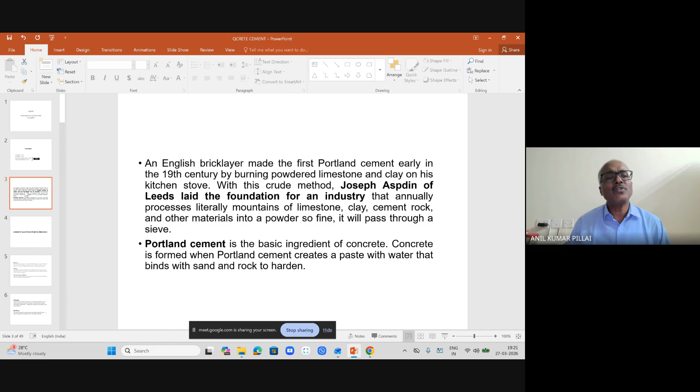Just to give you a brief overview, because when you look at cement as compared to other materials, cement is manufactured in a plant with a clear-cut manufacturing process and clear-cut quality assurance process. If you look at the Indian cement industry, you'll find the latest technology of cement manufacturing is actually in our country. We have been in the cement industry for quite a long time, and we have been able to bring in the latest manufacturing process.

So just to give you a brief overview, from a customer's perspective you must understand how cement is manufactured. Starting from the quarrying, what you call limestone mining, you'll find there are areas rich in limestone mines. Both high grade as well as low grade limestone would be there in the same limestone belt.

Other ingredients are also added, and it is crushed, ground, mixed and blended. What is important is, if you want to manufacture cement of consistent quality, the variations right from the raw materials should be evened out, and measures should ensure proper blending. We have different mechanisms for that, like the CF silo and the stacker reclaimer, which ensure that the standard deviation of the raw material is brought down. Because the challenge is to manufacture a cement with minimum variation.

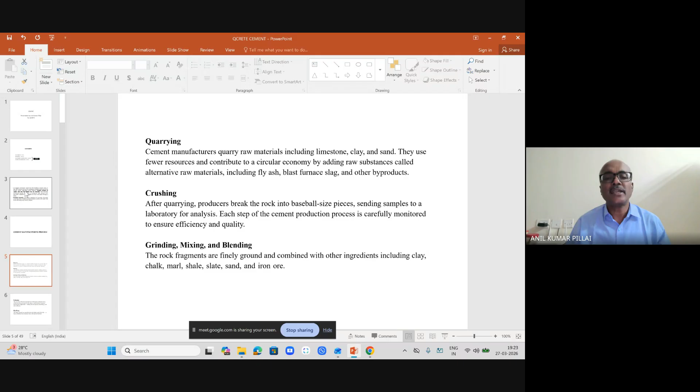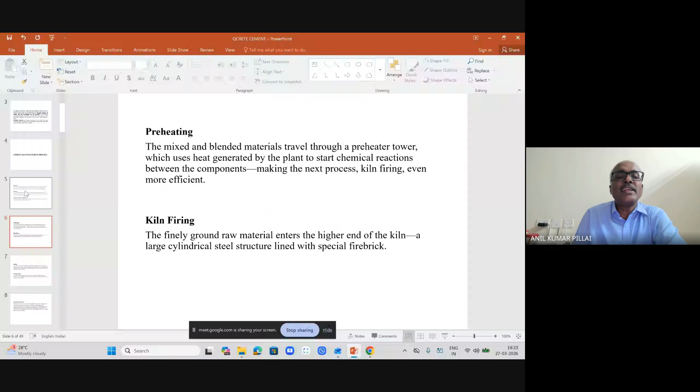You can manufacture a cement of very high compressive strength, but can you maintain it over a period of time? That is very important. You'll find the various steps, starting from quarrying to crushing, grinding, mixing, blending, and then you preheat, and then you fire the kiln. That is how the process is done. Then the cooling takes place. The kiln firing at a very high temperature of 1500 degrees centigrade, and then the cooling to 100 degrees centigrade, it all needs a lot of monitoring.

The clinker is formed, which is ground into fine powder and mixed with gypsum. Clinker is mixed with gypsum to form ordinary Portland cement. When you add a blending material like fly ash or slag, you get blended cement like PPC or slag cement. So this is the kind of process.

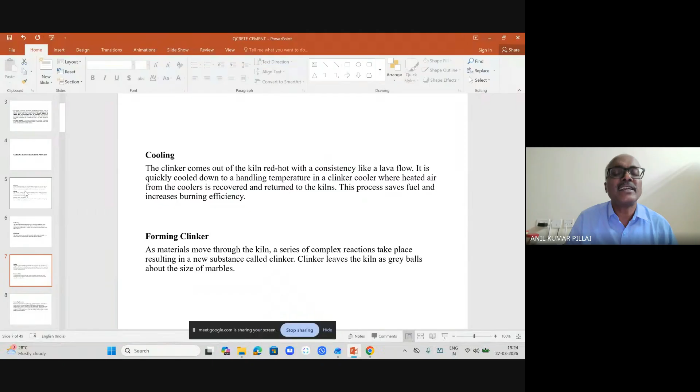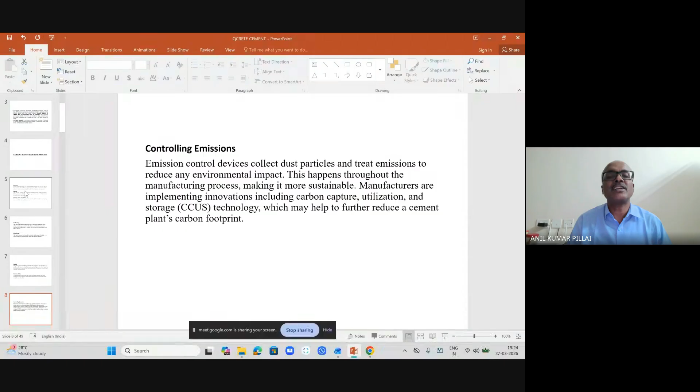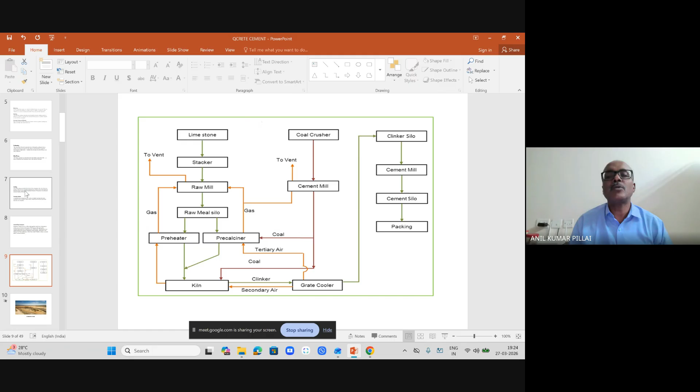You'll find that limestone quarrying is being done. The stacker reclaimer is there to even out variations. The raw meal silo, the preheater, and the pre-calciner. Before getting into the kiln, the entire raw material is heated to a particular temperature, and this is how it happens. The cooler is there, the cement mill, and this is a typical cement plant.

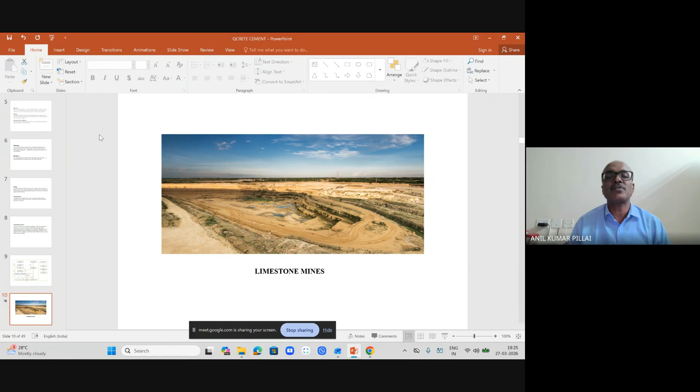So this is how the limestone mines look like. What is important is once the limestone is mined, rather than leaving the mines like that, we always have the practice of doing afforestation there, so that whatever we get back from nature, we give it back through the process of afforestation. So this is what limestone mines look like.

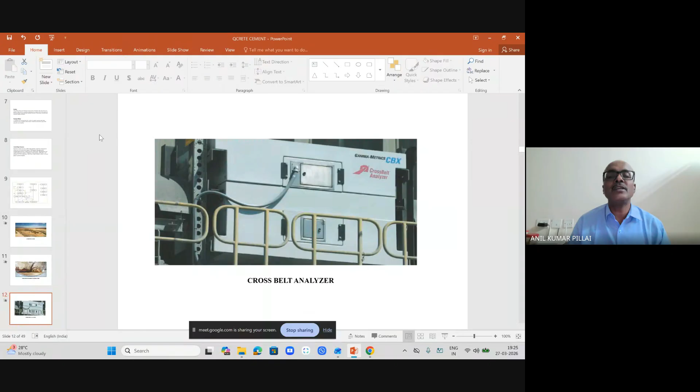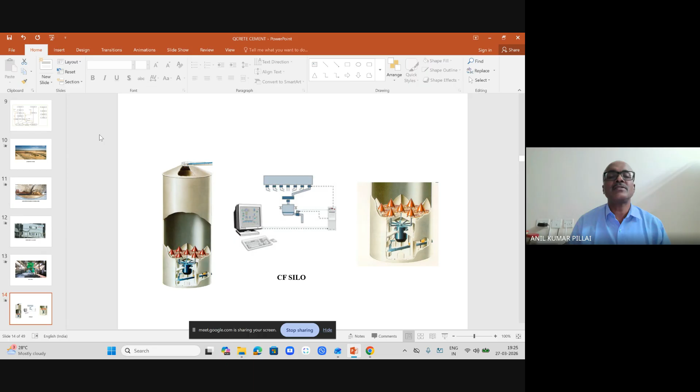So this is the raw mill, and you have the CF silo, continuous flow silo, where continuous homogenization takes place. Again, the objective is to bring down the variations in the raw materials. Then the preheater unit is there, where it is heated to 700 to 800 degrees centigrade. The kiln, as you can see, and this is the clinker.

So the properties of clinker are very important. The clinker is manufactured in such a way that the compound composition and the oxide composition are maintained so that the properties of cement are maintained. That is how you will find there are different types of cement.

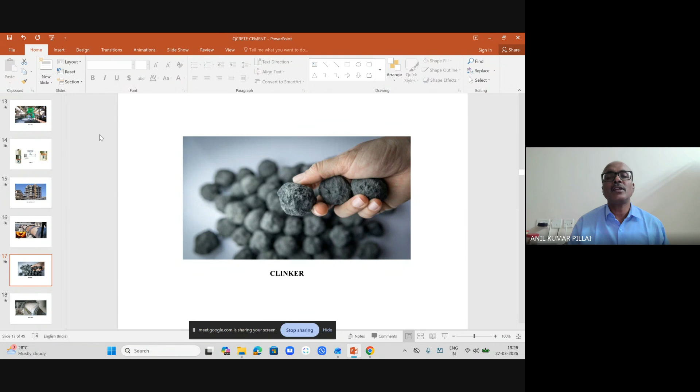Even within a particular type of cement, you can fine tune the properties that are needed. That is why we have this motto of right cement for right application, because by virtue of the clinker chemistry itself, you can change the properties of cement.

So you have the ball mill and various kinds of grinding mechanisms through which you get a cement of the required fineness. Roto packer is the kind of packer that is there to ensure that the cement is manufactured properly.

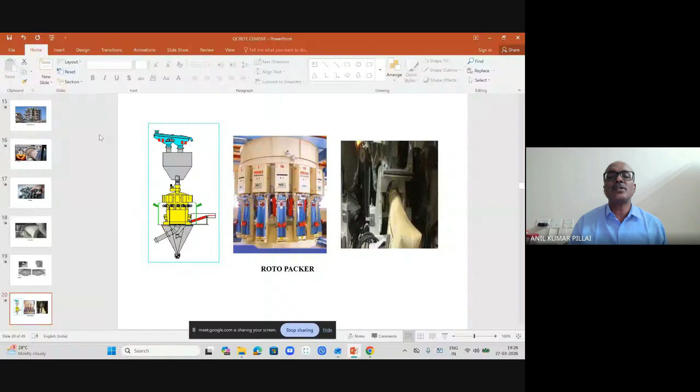This is just an indicative value because for most concrete users, they would be interested in knowing what the oxides are. So you'll find that lime, silica, alumina, iron oxide, and other minor oxides would also be there.

But what is important is the interplay between the lime, the calcium oxide, and the silica. That is very important, which enables the formation of compounds in cement. And these compounds in cement actually determine the chemistry of cement.

So that is where you'll find that when you add a chemical admixture, it is very important that you study the cement admixture compatibility. And the cement admixture compatibility to a great extent is dependent on the oxide as well as the compound composition of cement itself.

The tricalcium silicate, just to give you an idea, I'm not going into the chemistry of this, but we need to understand that tricalcium silicate gives you the early strength, dicalcium silicate gives you the later strength, and tricalcium aluminate gives the 1 to 3 day strength.

But the thing is that this particular compound, tricalcium aluminate, is limited, and because of tricalcium aluminate, we add gypsum in the cement manufacturing process so that the cement setting time is regulated.

And then you have tetracalcium aluminoferrite. So these are the compounds in cement which determine the later strength and the chemistry of cement itself.

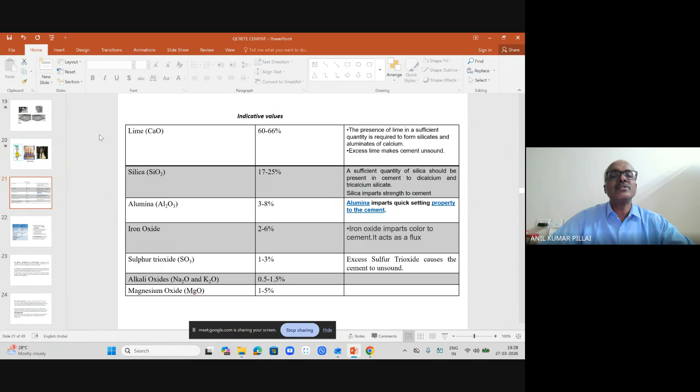Just to give you an idea, what happens in the cement manufacturing process is the oxides combine amongst themselves in a particular manner so that the manufacturing process is designed in such a way that you have the required percentage of the various compounds of cement, which gives you the strength properties and other properties of cement.

So that is how the chemistry of cement, in brief, is there.

So this is what you need to understand, that before actually starting the concreting process, there should be a kind of process in place wherein you do the trials at site on a regular basis. It is not enough that we do the trials in the initial stages and then later on, you don't do the trial.

Because what happens is that if you're having a major concrete pour, it is always good practice to have this process of trials in place at site, because we have seen in many places when this is not in place, they land up in issues and all that.

So this is what, as far as the oxides and compounds are concerned.

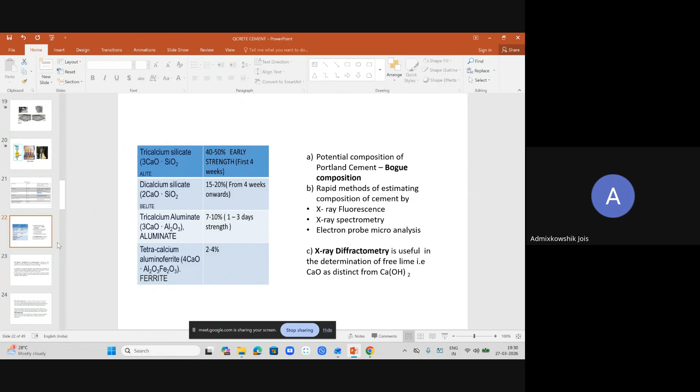Any responses? Sir, what I suggest, no sir? Yeah, you finish and the last 10 minutes we'll give for questions. Otherwise it will obstruct your flow.

Yeah, so this is the oxide and then the compound composition. And again, to reiterate, early strength, later strength, and this also gives some kind of early strength contribution in that, and this is very minimal.

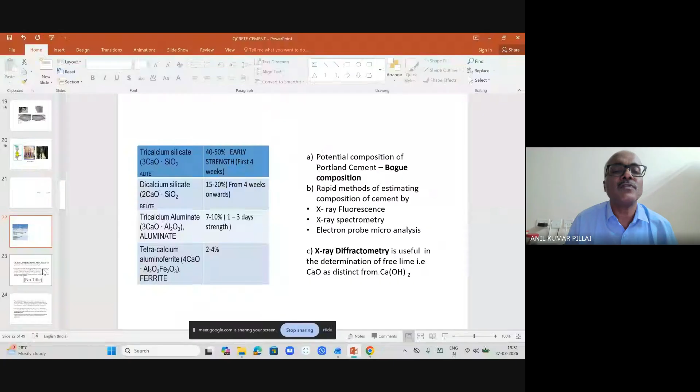And to evaluate the compound composition, you have different methods that we follow at our cement manufacturing process. Now, before checking the quality of the cement, this is very interesting. The first and foremost step that we do is the normal consistency of a cement paste.

We should not evaluate the quality of cement only based on NC, because there is no limit as such mentioned by the Indian Standard Code as far as NC is concerned. Normal consistency of cement is used to determine the amount of water that can be used to find out the initial setting time, the final setting time, and the compressive strength of cement. But in many places, people think NC should be within a certain range, like 27, 26, or 28, and if it's not there, there is some problem. No, it's not like that. On normal consistency, there is no limit at all as far as the Bureau of Indian Standards is concerned.

The normal consistency of cement paste is a laboratory test which helps us determine the amount of water to be added for the other tests involved. This is found by allowing the Vicat plunger to penetrate to a point of 5 to 7 mm from the bottom of the Vicat mold. That is how NC is determined, and it determines the quantity of water to be mixed for a given cement to give a paste of normal consistency, using the Vicat apparatus. The Vicat apparatus can also be used to determine the initial and final setting time.

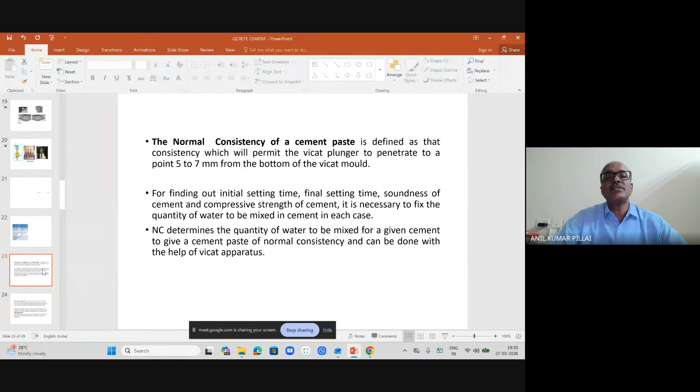If there is a mistake in measurement of NC, then your initial setting time value, final setting time value, and compressive strength of cement mortar can change. So it is very important that you measure the NC correctly. That is why at many project sites, when attempting testing of cement on site, you need to be very careful with NC, because the moment there is an error in the measurement of normal consistency, you will find that the other parameters change.

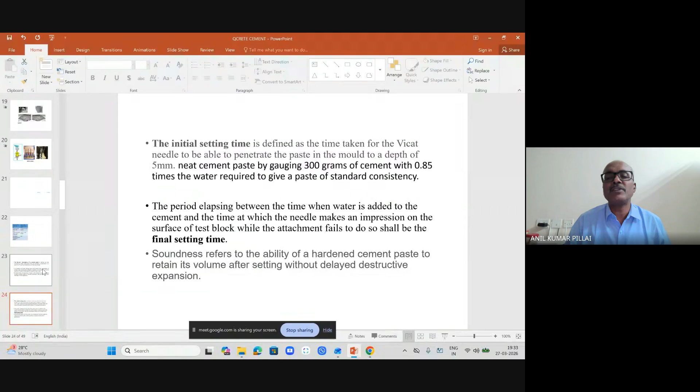The initial setting time and final setting time of cement help you find out the workability. It affects the workability of concrete and the placement of concrete to a certain extent. Of course, soundness is also there. The soundness of cement, we have two methods, Le Chatelier and autoclave, which refer to the ability of the hardened cement paste to retain its volume after setting without delayed expansion. That is what it is all about.

Unlike concrete testing, which as all of us know is done on a 15 centimeter by 15 centimeter cube, cement mortar strength is done on a 7 by 7 centimeter cube mold, under standard conditions, using standard sand which is available from Tamin. The basic idea of having a standard test is that it becomes easier for us to evaluate the various types of cement available in the market. When you have a standard test like this, you can compare the types of cement that are there.

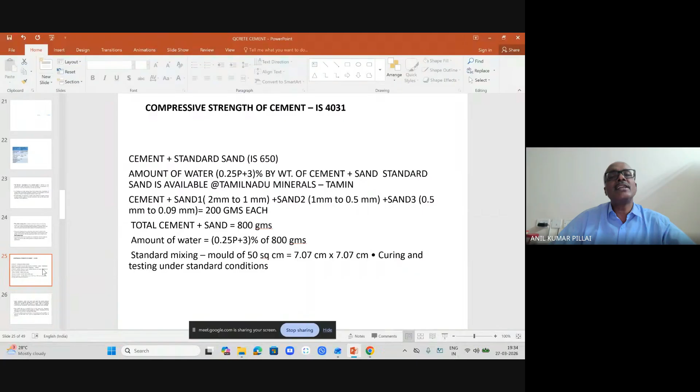This can be useful for a customer, because if a customer wants to evaluate the quality of cement, he can always give it to an NABL accredited lab, and this can be used to compare the compressive strength of various cements. Why I'm saying this is because when you look at a problem in concrete, you can dive deep into each ingredient of the concrete to find out where the problem or challenge lies. The compounds in cement itself hydrate and react with water to form different compounds.

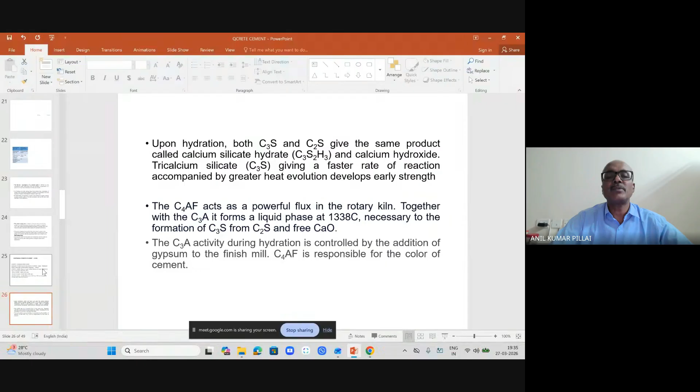It is on the basis of the hydration of various compounds of cement that it gives strength to the concrete or to the cement itself. This is how the terms C3S and C2S work, don't go by the formula alone. In cement chemistry, C represents calcium oxide, S represents SiO2, that is silica, and H represents water. So C3S and C2S form what we call calcium silicate hydrate, and calcium hydroxide is also generated in the process of hydration of cement with water. This is very important to note, because what is desirable is the calcium silicate hydrate.

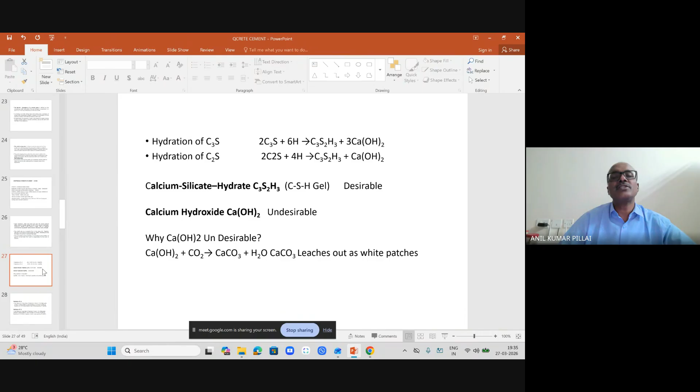Whenever you look at a concrete, inside that, if you look at the cement paste, the undesirable portion is what you call calcium hydroxide. That should not be there, because the moment it is there, it affects the durability of the concrete itself. So the CSH gel has to be increased, and you need to have a measure to remove the calcium hydroxide so that the durability of the concrete is enhanced. Hydration of C3S, as all of us know, because C3S or tricalcium silicate gives the early strength, logically when tricalcium silicate reacts with water, the reaction would be very rigorous, and more heat of hydration would be there.

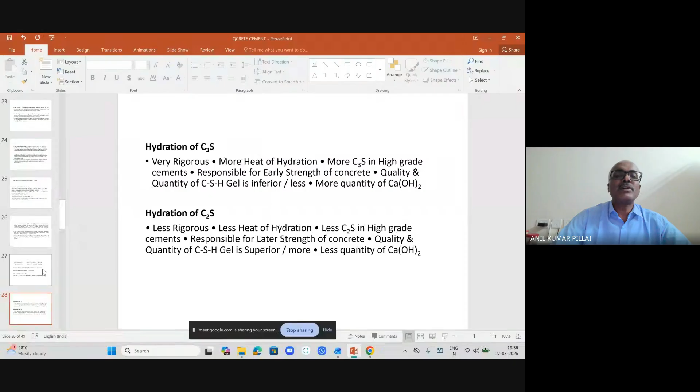C3S is responsible for the early strength of concrete, and more quantity of calcium hydroxide also comes out. Of course, C2S is less rigorous as compared to C3S, and in comparison, you will find that calcium hydroxide would be lesser.

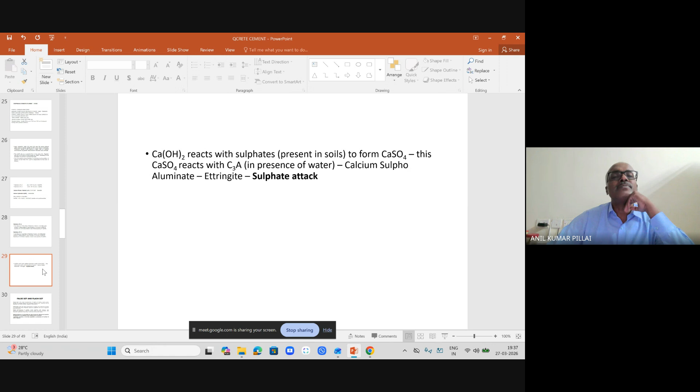Basically, what we have seen at practical sites, you will find these two terms: false set and flash set. False set is a rapid development of rigidity in freshly mixed cement paste, without the evolution of much heat, and plasticity can be regained by further mixing. So this is nothing to be alarmed about, but sometimes it may happen.

Flash set is the rapid development of rigidity, but with the evolution of considerable heat. So plasticity cannot be regained as far as flash set is concerned. It can occur due to various reasons, just as far as cement is concerned.

Setting behavior in concrete can also be due to the nature and quantity of admixture, and is different from the setting time of cement. The hydration process in concrete speeds up because of a number of other reasons also.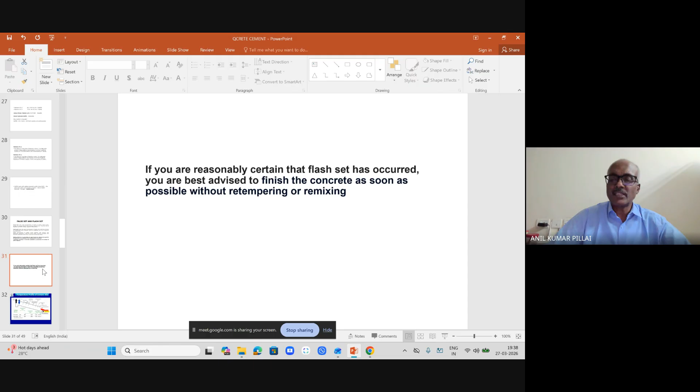So this is just to give you an idea of the difference between false set and flash set, which sometimes happens. If you are reasonably certain that flash set has occurred, you are best advised to finish the concrete as soon as possible without retempering or remixing, because in flash set, plasticity cannot be regained.

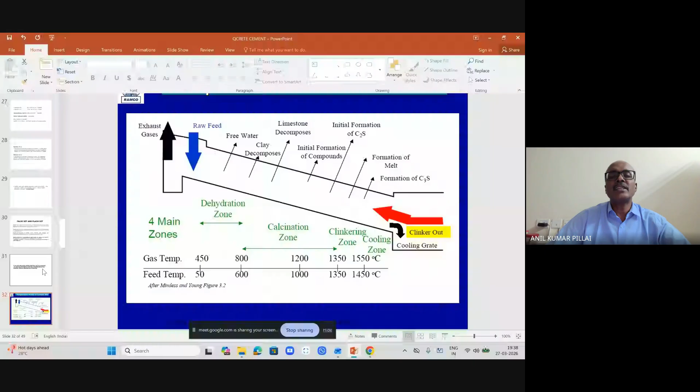Just to give you an idea, taking you back to the manufacturing process, it is very important that the temperature is maintained at various stages while the clinker is coming out. Maintaining temperature at the various processes is very important.

If you look at a cement test report, there is a physical requirement and a chemical requirement. In the physical requirement, you will find that now 43 grade and 53 grade OPC have been combined into one code, IS 269. As far as 43 grade is concerned, there is a minor change, and there is an upper limit of strength also, that is 43 plus 15, 58 MPa. It should not go beyond 58 MPa.

These are the parameters as far as cement is concerned. You will find that fineness is there, and it should not go below this limit. Earlier we had the method of sieving the cement, but nowadays we have what we call the Blaine's air permeability apparatus, where it is measured in meter square per kg. It's a much more sophisticated method than the conventional sieving method, where you have a limit of 10%, a particular percentage retained on the 90 micron IS sieve. But here it is measured using the Blaine's air permeability apparatus.

Then you have the setting time. The BIS states it should be between 30 and 600 minutes, so a cement can be manufactured between these two limits based on this. Normally you will find that the initial setting time of cement will range between 150 to 200 minutes, and the final setting time somewhere around 180 to 300 minutes. That is how the initial and final setting time of cement is specified.

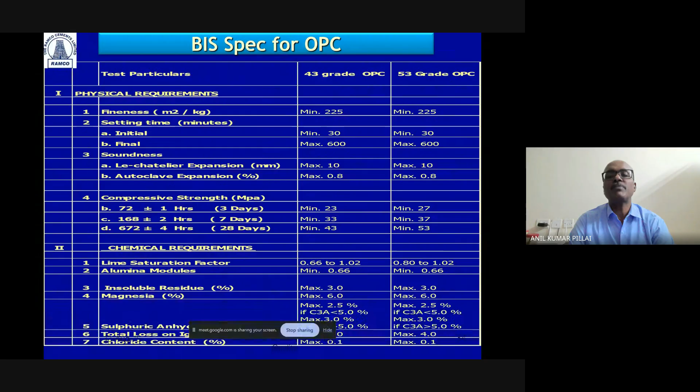So as a customer, if you are given this cement test report, you get a fairly good idea of the physical requirements of cement and the chemical requirements of cement as per the code and as per the particular cement concerned.

So this is what you will find: clinker, gypsum and fly ash are ground together to give you Portland pozzolana cement. Even in Portland pozzolana cement, you can get a cement of higher compressive strength by changing the chemistry of the clinker, as well as the chemistry of the cement itself, and by the way it is ground. That is why you will find various types of Portland pozzolana cement in terms of strength-gaining properties.

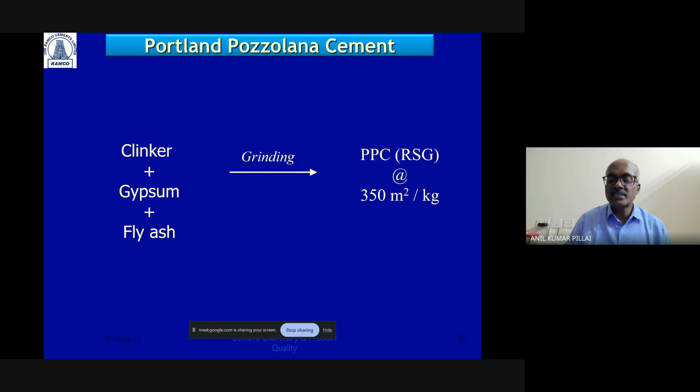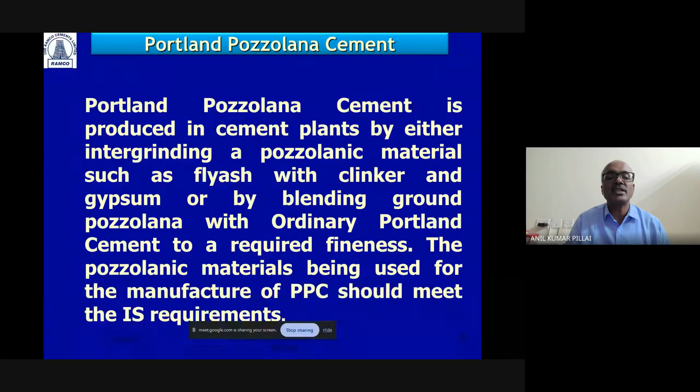So if you want a PPC with only low heat of hydration, you can go for it. Or if you want a PPC having low heat of hydration as well as higher compressive strength, you can have a cement manufactured based on that. So this is what it is all about.

And if you look at the test report of Portland pozzolana cement, the fineness would be higher. It would be close to 300 meters square per kg, whereas for ordinary Portland cement, the limit is stated as 225 meters square per kg. The basic idea is that if you have higher fineness, the reactivity would be much better.

Again, for Portland pozzolana cement, you will have the initial and final setting time, the LeChatelier expansion of maximum 10 mm, and autoclave expansion of maximum 0.8%. Then you have the 16, 22, 33 strength grades as mentioned in the code, but we can always enhance the compressive strength of cement through various other measures.

And here you will find drying shrinkage is also measured, and fly ash addition is specified. For example, in the cement manufacturing process, the minimum limit is 15% and the maximum is 35%. Now this limit does not apply when you add fly ash at site, you can go in for a higher percentage, but this is only applicable in case of cement manufacturers.

So here you will find the insoluble residue, which is just a representative value. But there is a formula for insoluble residue in terms of the fly ash percentage, so if the fly ash percentage is higher, your insoluble residue will also be higher.

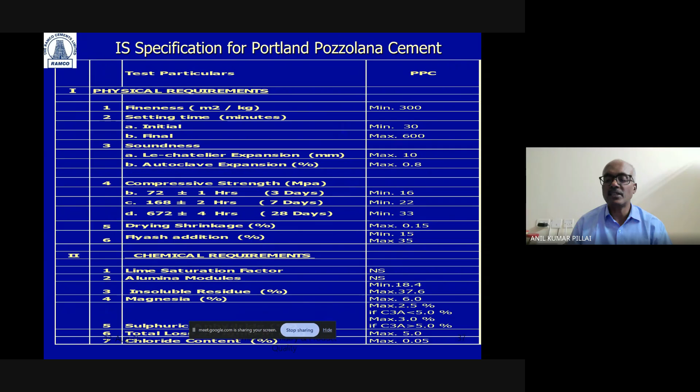So these are some of the essential tests that can be done on cement: specific surface, which we call fineness, consistency, setting time, soundness, compressive strength, and particle size analysis, which is not mentioned in BIS, but we do it on a regular basis because based on the particle size analysis of cement, you can control the quality of cement itself to a greater extent, and you can monitor it.

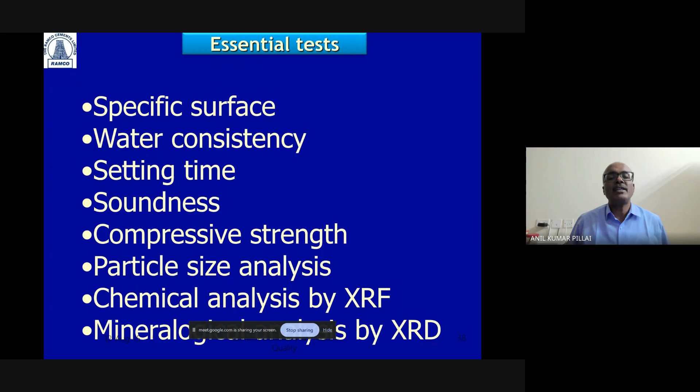This particle size analysis and the chemical analysis by XRF and XRD are not within the purview of BIS, they are not mandated. But if we adopt these three methods of testing cement, we are able to look at the way cement can be customized, because customization of cement is only possible if you have a detailed analysis and study of cement itself. So there, particle size analysis and chemical analysis by XRF and XRD play a vital role.

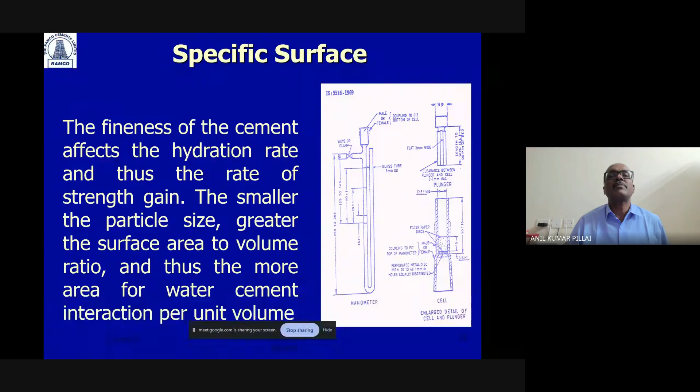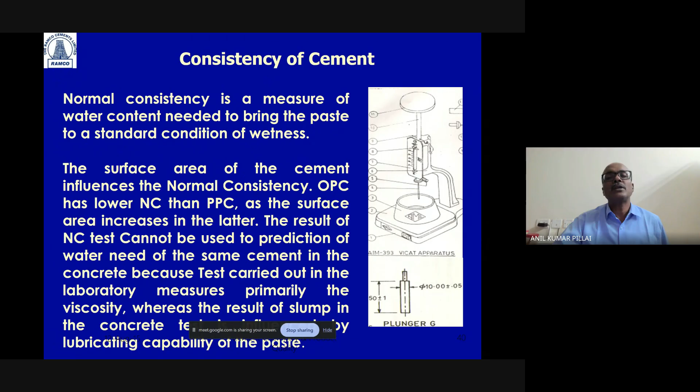As far as the fineness of cement is concerned, we use the Blaine's air permeability apparatus. The consistency of cement is measured like this. Normally, the error occurs when you actually mix the cement paste, and it all depends on the kind of pressure given to the paste at the time of measuring the normal consistency.

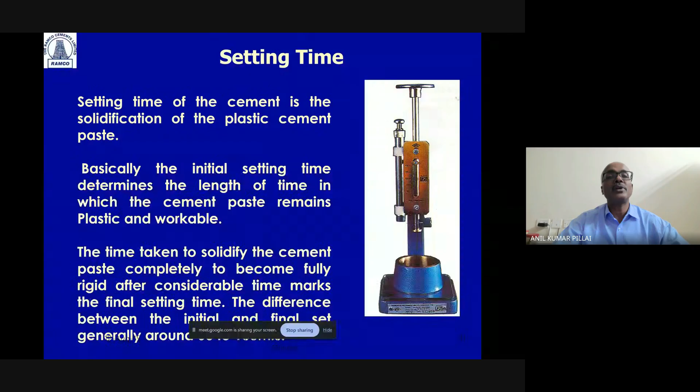This is what I was mentioning initially. We should not confuse the initial setting time of cement with the setting time of concrete, because setting time of concrete may not be the same as setting time of cement. Setting time of cement uses only cement mortar, whereas setting time of concrete has other ingredients also, and it is measured by a different apparatus altogether. So you cannot exactly equate the two.

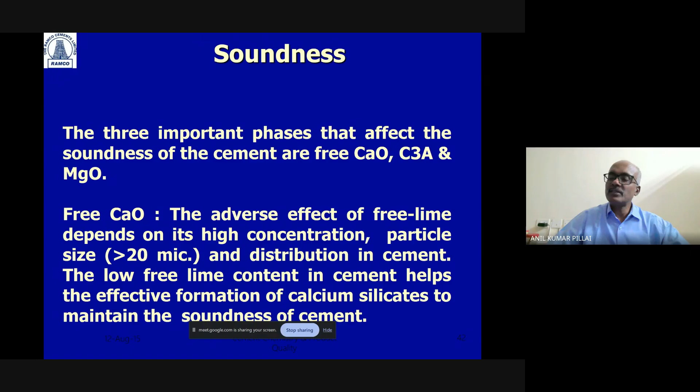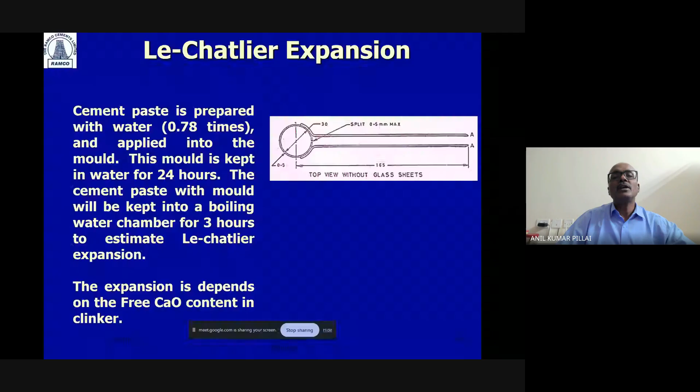This is the soundness of cement mortar that we are measuring. It is dependent on the various compounds present, especially the free lime or calcium oxide, which can affect the durability of cement. The soundness by means of Le Chatelier or autoclave helps us determine whether the expansion is within limits, and it is very important. We measure the durability of cement by these two methods, Le Chatelier expansion and autoclave, just to see how much expansion is taking place. So this is what it's all about, both the tests.

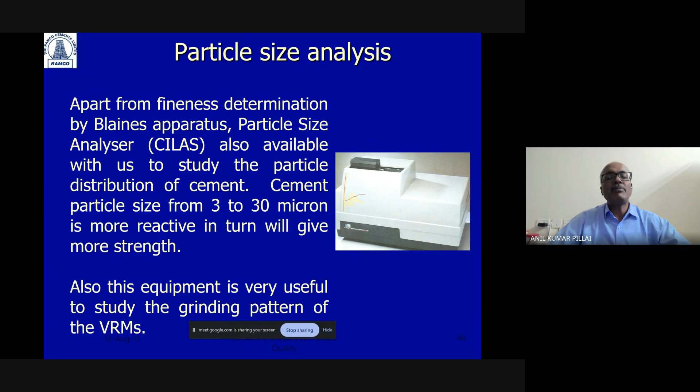The compressive strength is also measured using this thing. For particle size analyzer, we have the CILAS particle size analyzer to see the cement particle size from 3 to 30 micron, which is more reactive. It is very important that we look at that range of particles of cement, because that happens due to the way the cement clinker is ground. That is where particle size analysis comes in.

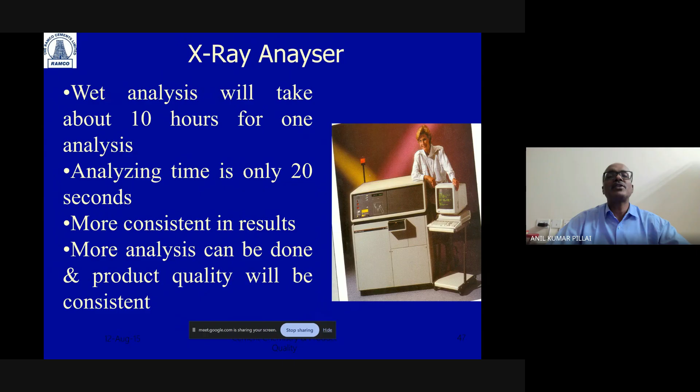X-ray analyzer is a very fast way of analyzing the cement itself, and it can be done within a shorter period of time. The diffractometer helps us look at the mineralogy of raw material and the quantification of free lime. This is how cement quality is being monitored.

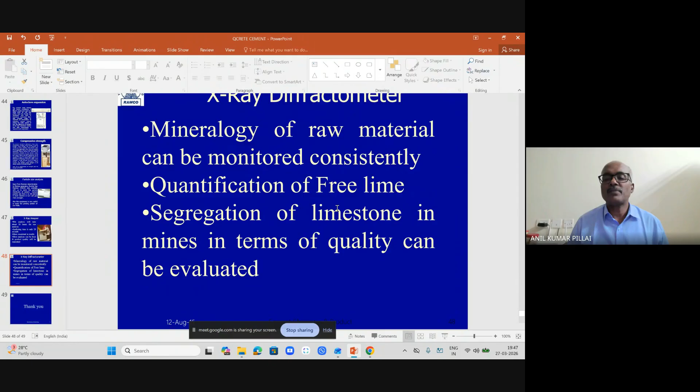This is all I wanted to share with you - about cement, the properties of cement, the way it is being manufactured, and the important parameters of cement. So I just wanted to confine myself to that.

Of course, there are various challenges in concrete, as we know. It's very important that we look at cement consistency, the quality consistency over a period of time, which gives us an idea. But more importantly, when we look at concrete, we need to look at the variability of other raw materials also, because when we get a particular type of concrete in the laboratory, we need to know whether we can actually have the same property in a batching plant.

Sometimes the admixture dispenser can be a challenge because admixture dispensing at the lab can be much more controlled. We also need to see whether the admixture dosage is changing with the type of cement. It's very important that whenever you change the source of cement, the trial with the particular admixture is important, because without that, you don't get the desirable properties.

So this is what I thought I would share with you. I'll conclude my presentation now. This is what I wanted to share.